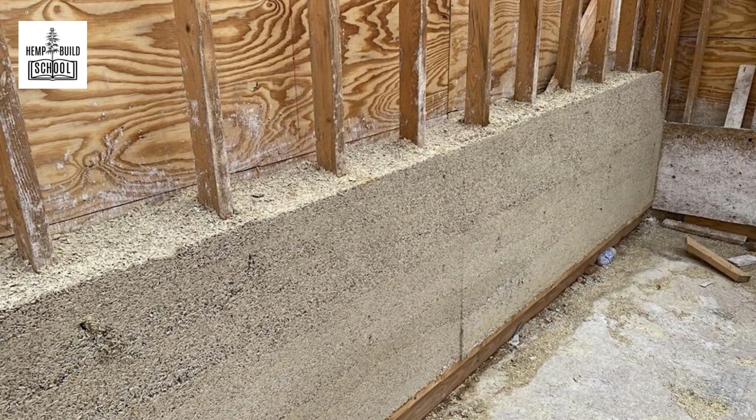My name's Anthony Dente. I run a structural engineering firm in Berkeley, California, but we're licensed across the country. Here are some of my team members that I'm very grateful for.

We're licensed across the country primarily because people find it difficult at times to find engineers with experience with alternative building systems. With experience comes some spreadsheets already set up, and we understand what the research is. But there's also an open-mindedness issue with engineers too - it's a different story with each, who's open to looking at research to get strength design values from, and whatnot.

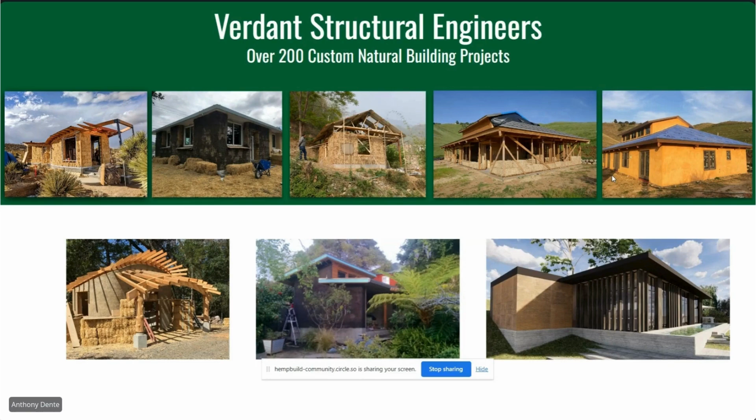We work with just about any material you could categorize under natural building or low carbon construction. Here's some straw examples, some cob examples, an Adobe project down in Topanga near LA. Here's some bamboo work we did in Nepal, straw bale earthquake rebuild, some rammed earth work, some panelization work, some earthen block product work we do.

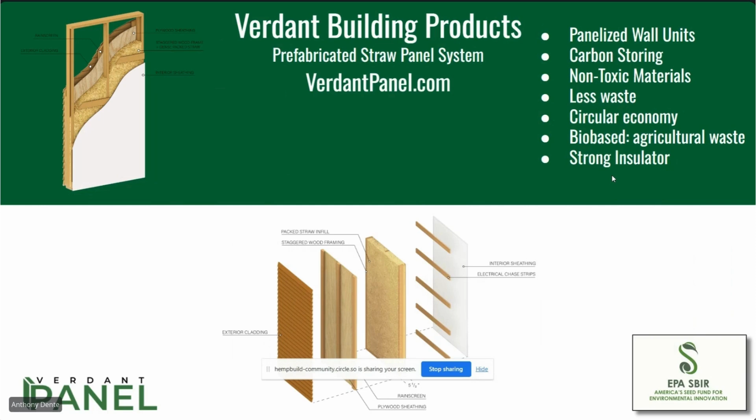I'm also running a company that the EPA gave us - we collaborated with the EPA to develop this prefabricated straw wall panel. If anybody ever wants to know more about that, or is in the business of investing in seed fundraising businesses, let me know. It's a whole new world for me, but a different subject.

It might be relevant to you that I'm the vice president of the Cob Research Institute, which pursues research and code development for monolithic Adobe construction primarily. I just came out with this book with New Society Publishing on cob construction.

I actually think that sections of it could be really relevant to all of you too, how alternative materials, particularly the code, work. But I don't think you should just buy it if you're not interested in earthen construction, unless you really like my talk and the information that I have, in which case proceed.

I shouldn't talk about building codes without talking about Martin Hammer and David Eisenberg, who are mentors of mine and close friends that I've learned so much about manipulating the building code with, the art of doing so. Marty was the lead architect on the Hemp Lime code in the IRC, and David Eisenberg played a huge role. They're both wonderful - if you ever have questions, do reach out to them.

The first thing I always like to talk about in building codes - how have you covered this section of the building code in the class? Not at all, okay. This is historic now.

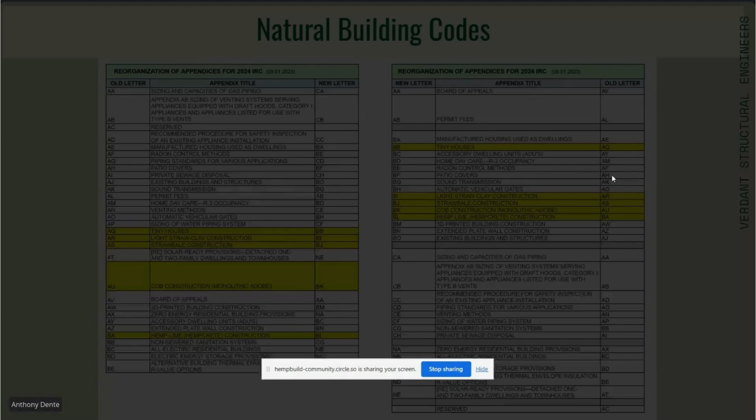I should mention that they're just throwing a wrench in our works, and they're changing the letters that are associated with all these codes. So anyone who is used to the former lettering, like AS for straw bale, it's now BJ. And the hemp lime code started as BA, but it is now BL. So hopefully you didn't memorize BA and you can just start right off with BL, unlike me, who's going to screw this up forever.

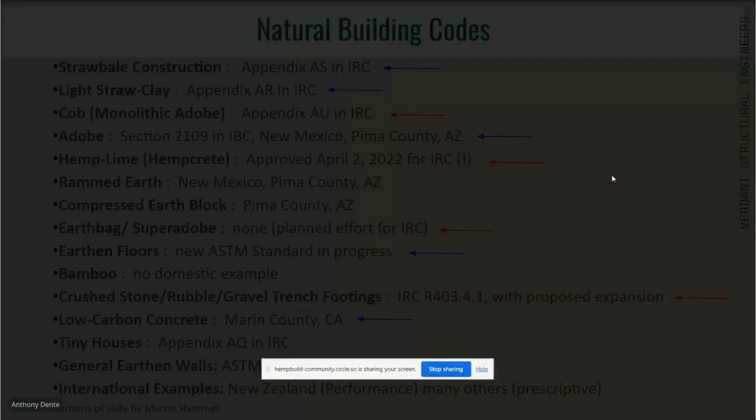I should note that, like on the alternative section, the closer the analog you can get to your building, the better. So even if it's not code in your jurisdiction, it's still valuable. It's an ICC approved document, hopefully you aren't changing that much from it too. Maybe you're following every single rule.

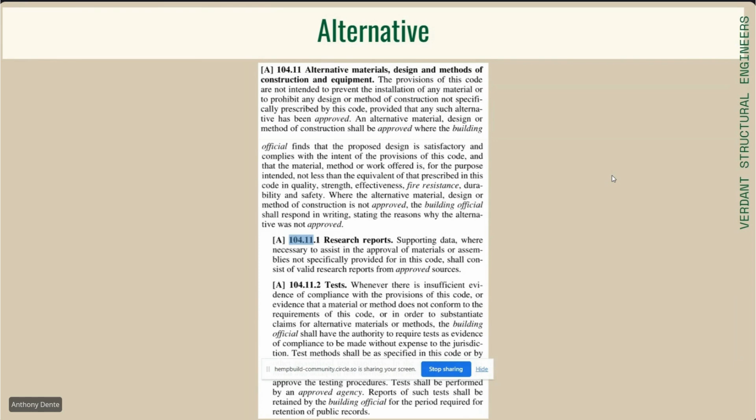It's just not official code. Most of the time you can have a human to human conversation with someone in the building department that they can understand, and get a yes, we can let you use that. If you're having a hard time, I recommend you reach out to me or any of the professionals that the USHBA recommends, to have a licensed professional have that conversation if you aren't licensed or don't feel like you have the authority. If I go in there and we're getting a lot of pushback, I'm starting to pull out the quotes of the ICC committee and things from the hearing, in which case I can jump up.

This is the slide, it's a little funny formatting, sorry about that. But we're engaging in this multi-state endeavor right now to try to get the appendices adopted. There's all kinds of places to go here. And again, I don't know the best way to have this conversation with a new group joining halfway through, but I'm just going to keep going on this general narrative of talking to codes and then getting into design details.

Anyway, just stop me. This is a unique kind of conversation as far as presentation goes in that respect, but that's fine. Well, if you could put it through the mind of a person who wants to build a house but maybe does not want to understand the code completely, but how they react with the building department, what sort of, when you do the engineering for these...

It's comforting, right, to the building department that an engineer has looked at this and it's going to adhere to the code. So sort of what do people need to know?

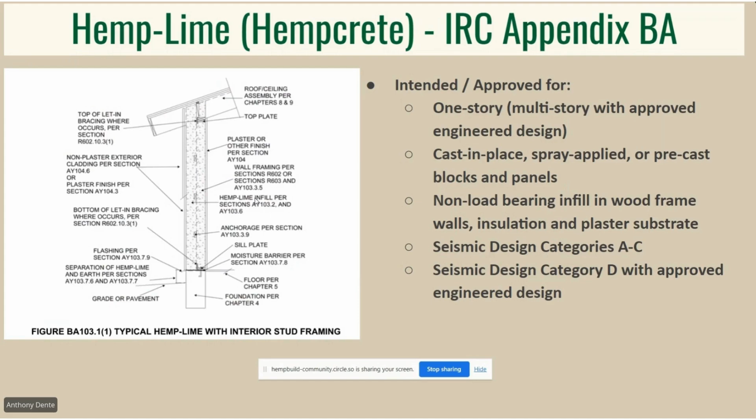Hempcrete construction, hemp lime construction, from a structural standpoint - it's fun for us to say we design Hempcrete as structural engineers, but the Hempcrete is really the insulation going around our structural stuff, and we're really just manipulating conventional systems. I was talking to a colleague about this today at lunch - for any natural building system, we call it natural building, but really there's normally a concrete foundation, there's a wood roof. It's just a portion of the building in between that we're altering.

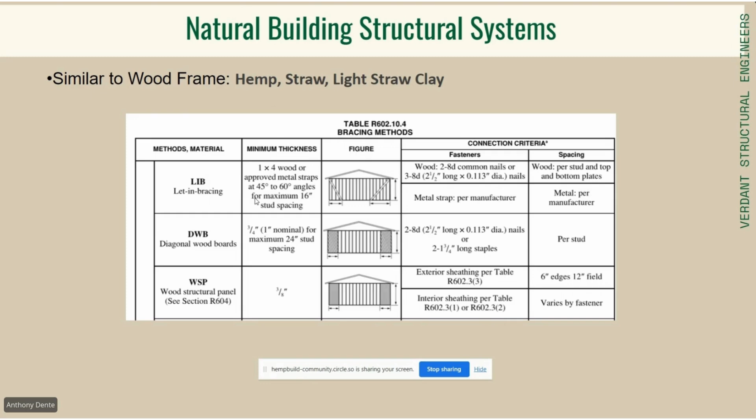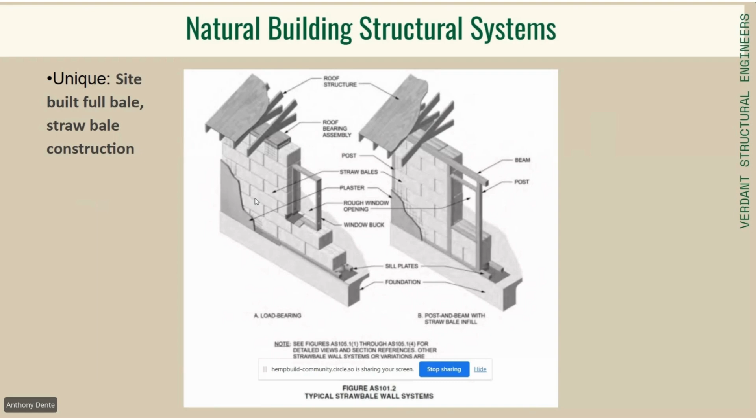For some straw systems and most hemp systems, that's even more the case, because we have a stud system and this let-in bracing, a kind of historical bracing system. There are other natural systems that are more like concrete - reinforced plaster straw bale, which I want to bring up because this is possibly an option for hemp shear resistance into the future. When we get more technical later on, I think we can talk more about that.

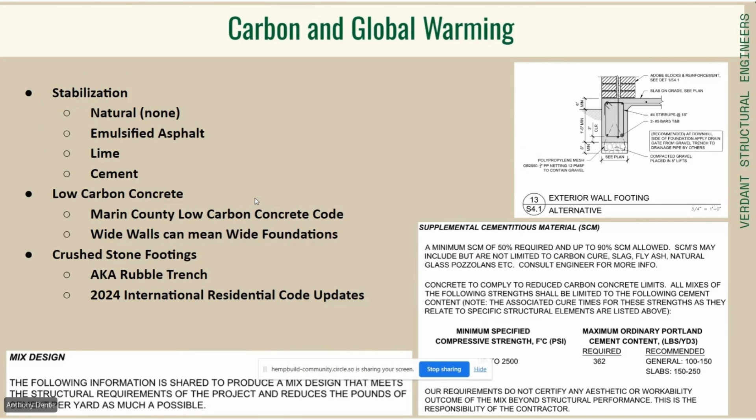I'll come back - we can come back to carbon and concrete - but width of foundation, rubble trench. Anybody want to talk about rubble trench? I was the lead proponent for the advancement of the rubble trench crushed stone code sections, which are now in the body of the code.

But we talked earlier - it still says Appendix BA because the copies I have, we're still waiting for the ICC to issue the official 2024 IRC document. We can't get the official document yet, which I didn't realize was so delayed.

The bracing requirements - you can see in section BA103.3.2 that it kicks you to the requirements for let-in bracing that have existed for a long time in the IRC and the documents that created the IRC. For anybody that cares, it was around the year 2000 that there were 3 different building codes across the nation, and they combined all of them. So the IRC itself isn't that old.

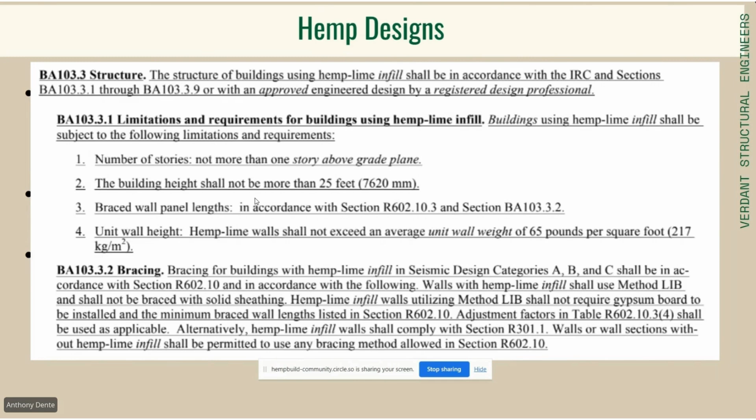This let-in bracing only goes up to seismic design category C, and that's for a few reasons. One is that it's not a very redundant system - its connections at the top are connected at one point, and when you have a cyclic loading condition of an earthquake, you need it to perform back and forth, back and forth. Wind doesn't quite have this problem since it's a one-directional load - once you engage that bolt, you're good. It's a little more complex than that, but it's not nearly as intense as a high seismic force resisting system.

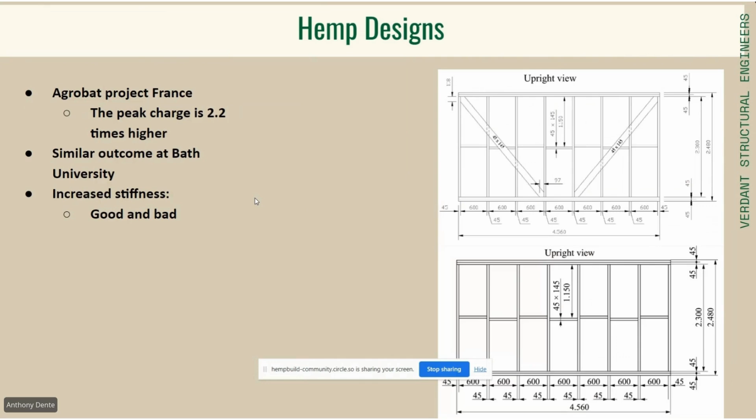But we said just use the tables that exist for let-in bracing design, except you don't have to put the sheetrock on the system. The let-in bracing values in the IRC are for this let-in bracing, which is called let-in bracing because it's an old-timey way of cutting out the stud and slipping in a 1-by.

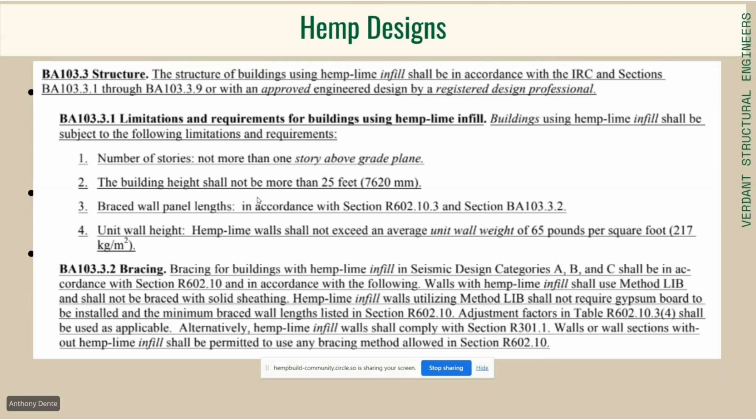There are advancements to this technique that Simpson has helped drive, Simpson Strong Tie, the hardware monopoly, where they have a strapping product with interesting language in their product manual stating it meets the same requirements as let-in bracing, but doesn't tell you how strong that is. Because of that allowance, you can use either wood let-in bracing or the strap option from Simpson. Here you can see we give all the options of strapping available to the contractor building this section.

There were two studies we cited, neither to prominent US-based ASTM standards: Bath University, and even more so the Agrobat project in France, which did in-plane shear tests. On top, they tested a let-in bracing wall, and on the bottom, the same wall without let-in bracing but with Hempcrete in the center. The peak load resistance was 2.2 times stronger with the Hempcrete, and it was also 10 times stiffer.

People who don't practice engineering in seismic zones just assume stiffness is an automatic plus. But stiffness attracts load, while flexibility allows dissipation of energy. So there are a lot of benefits to flexibility in seismic zones, but normally strength comes with stiffness too. So you're always trying to find that balance.

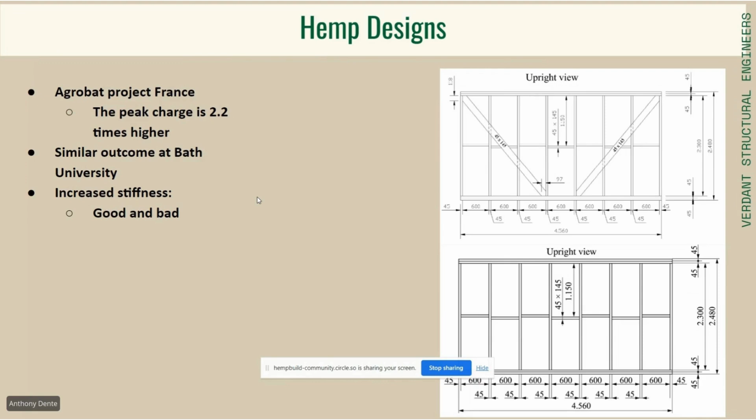We put in language all throughout the code that we're not prohibiting use, you just need a design professional to help you, which is a little against the rules, but I hope this secret's safe with you. We put that in because it opens doors in conversations. Really, anything with a design professional involved is technically allowed to be submitted through the IBC, and you don't need to state it directly in the IRC. It's almost a little funny to state it there, but it is helpful, and we do it when they let us.

If you have a design practitioner trying to do a custom design for let-in bracing, there are places where you can find design values. This report is one of the best ones. It credits about 200 pounds per linear foot for let-in bracing. Now, that's not that much.

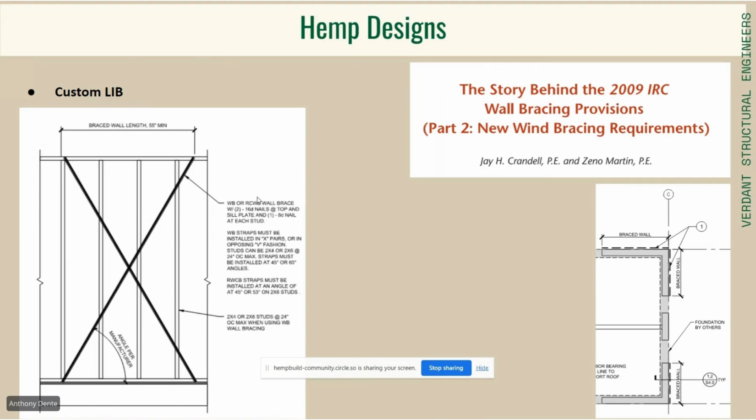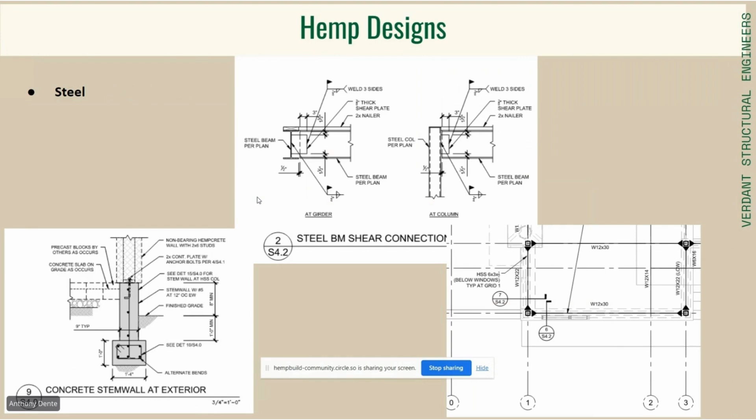Here, some clients have been exploring steel. Steel is normally way too expensive for residential projects, but there's this organization that believes if they don't do any drilling in the steel, keep it out of the shop, and do all the welding on site with an on-site inspector, they can make that cost effective. I don't know if that's turning out to be true for them, but this is a way to use steel moment frames to keep your structural engineer essentially out of your business on your wall system, so you can do as you please between it, with all the global lateral load systems taken care of up there.